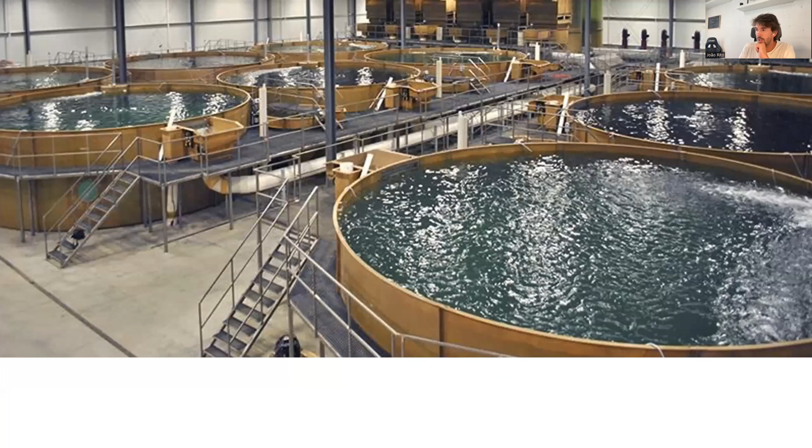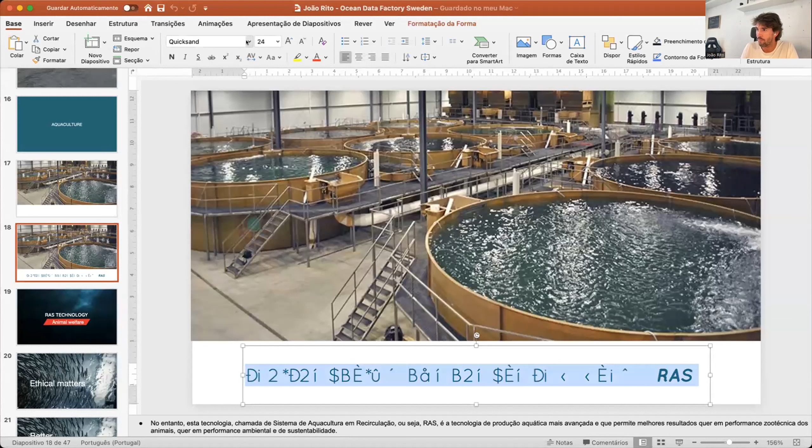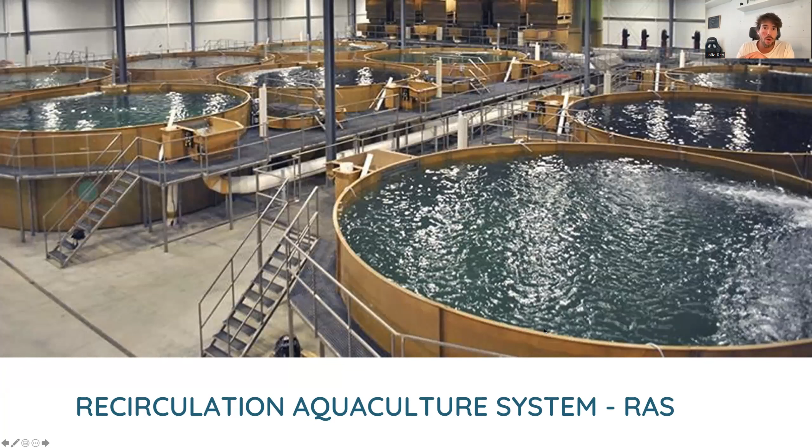But what I'm going to talk to you about today is not any of those examples I've just showed you — it's something similar to this. This is what we call aquaculture as well. Sorry, there's a mistake on this, let me just correct this. This is what we call a recirculation aquaculture system, RAS. This is another type of aquaculture, and we're talking about marine aquaculture using marine water, but it's all done indoors, in a completely controlled environment, land-based. Hopefully it's usually located onshore, close to the coast, where we can actually have access to the seawater.

And why RAS? Why do we trust RAS technology? Well, RAS technology is, in our point of view, a way of assuring animal welfare. And to us, animal welfare is the most important point when we're talking about farming animals. I'm going to talk about all the points.

First of all, obviously, because of ethical matters. As a biologist, I do care about organisms, I care about nature, I care about animals, and it would make no sense to me to farm animals without taking care of them, without taking care of their welfare. For obvious reasons, they are sentient animals, sentient organisms — promoting suffering would not be the point of our operations.

Also, by taking care of animal welfare, we get a better zootechnical performance from those organisms, because they are well treated. They can actually respond better physiologically — they work better, they have better conditions. And those better conditions are reflected in the results and performance they have in these systems. One of them is fast growth — a fish can grow much faster if it's maintained in good animal welfare.

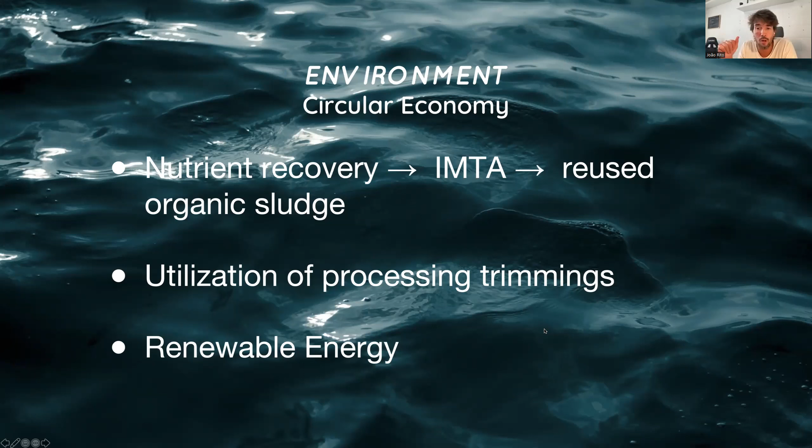And now, just to finalize, I'm going to show you what we usually show as a pitch presentation of our company. So, based on all these concepts I just talked about, we created SEAentia, a startup, an aquaculture startup located in Portugal.

Our objective is to tackle this problem: are we able to sustainably feed the growing world population and achieve the excellence demanded by consumers in topics like biosecurity, diversification, transparency, and sustainability? According to the FAO, by 2030 fish production needs to increase by 110 million tons, which means we can reach 1.1 trillion euros of income.

Our proposal is to produce what we call corvina. In English it's called meager, but we prefer to use the Portuguese name, corvina, which is a high quality white fish with a very good nutritious profile, excellent taste, low feed conversion ratio, fast growth, and already some public acceptance.

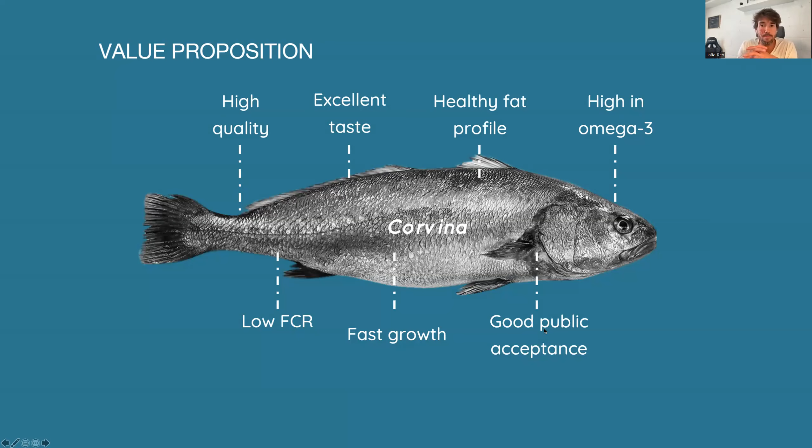We will be the first company in the world producing corvina in a recirculating aquaculture system, RAS, which allows us to promote animal welfare and avoid diseases and parasites without using any antibiotics or other chemicals. So we will not contaminate the water and we will not contaminate your food.

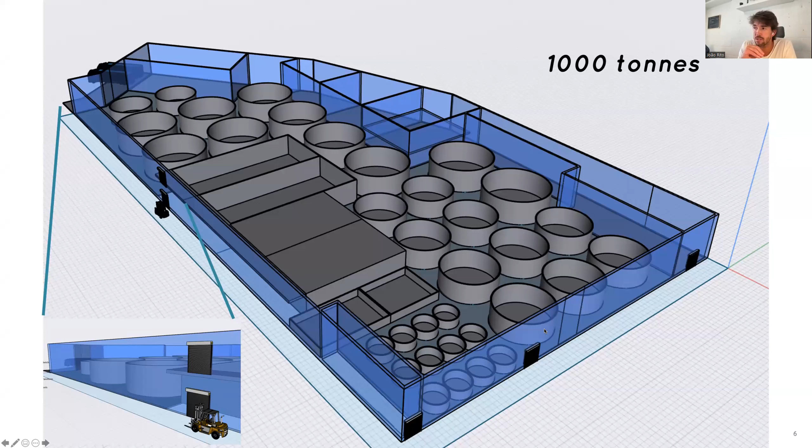This system is designed to be implemented in an area of about 12,000 square meters. This isn't updated, but it's actually going to be able to produce about 1,500 tons of corvina per year.

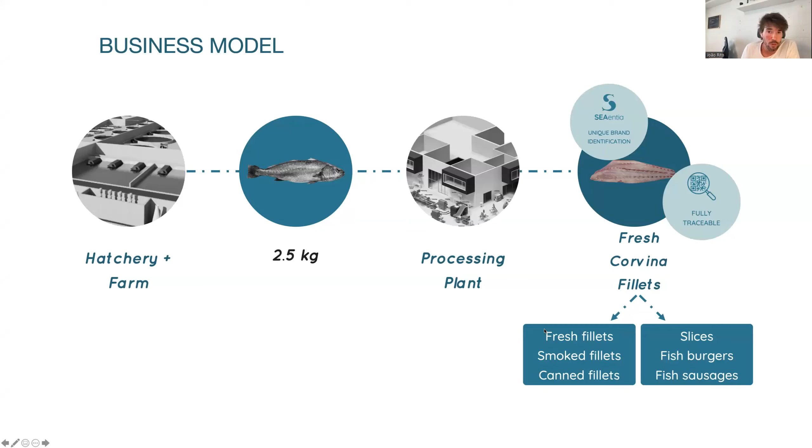The model is going to be with our own hatchery and farm. We can grow corvinas up to 2.5 kilos, then process the fish into different products like fillets, smoked fillets, slices, burgers, sausages, whatever—all identified with our own brand, fully traceable and also certified.

Like I was saying before, we bet a lot on circular economy to reach our sustainability standards. One thing we want to implement, not yet done, is to use the sludge as fertilizer or for biogas production, to use effluent nutrients to produce lower trophic level organisms through an integrated multi-trophic aquaculture system, and also to use processing trimmings for fish oil and fish meal production.

Regarding solar energy production, we can cover the rooftop of the whole building—talking about 12,000 square meters—and optimize energy production, with payback of that investment in about 3 to 4 years, which is quite fast.

Obviously we have competitors: fisheries supplying wild meager and offshore farmers supplying farmed meager. But we have a distinct advantage—providing biosecurity, traceability, quality, and environmental protection all together in this piece that can be your food. By choosing this food, you can help save the ocean.

The team is comprised of me and Nuno Leito. We are two biologist friends who got passionate about aquaculture and decided to implement our knowledge to start a company and play a bigger influence in society. Other partners include the stakeholders and shareholders of the company: João Jones, Sonia Rito, Thierry Lousteau, and another company called All the Way.

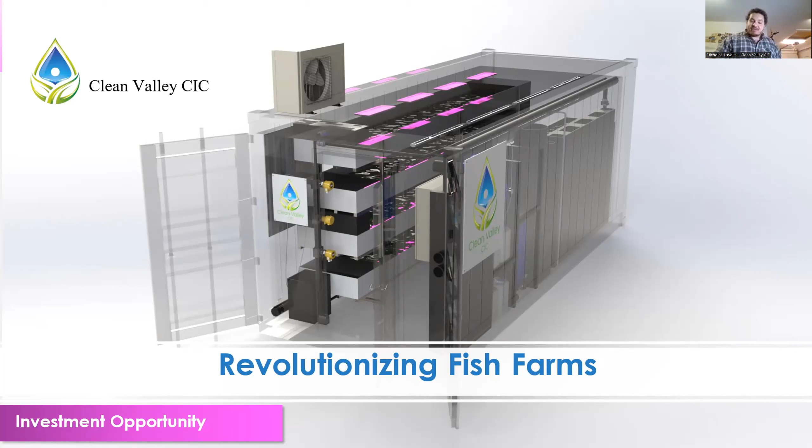João's already given a perfect introduction to what aquaculture is, so I'll be brief in my explanation. I'll just provide some further stats on the industry as a whole, and say that it is growing.

Even as I speak now, this chart, which was famous for being shown around from 2015 to 2020, is now out of date. It showed aquaculture near 50% of how we normally gather and get our fish to the dinner plate. Now it's closer to about 75% of the fish we buy in grocery stores that comes from aquaculture, and that trend is only going to continue to grow.

So aquaculture is not only seen as the way we are going to feed the world, but as a more sustainable way to feed the world. There's a ton of United Nations SDGs tied to aquaculture, from providing cleaner water and recirculating economies, to more innovative communities and cities. It will provide new ways to protect life below water and bring vitality back to regions in the oceans and seas that have been left destitute for decades and hundreds of years.

Aquaculture, as João showed you, is essentially fish in tanks, and it's a practice that has been around for thousands of years. Think about pond aquaculture back in the ancient days of China and India, where you take fish, put them in a pond, and feed them until they're big enough to harvest.

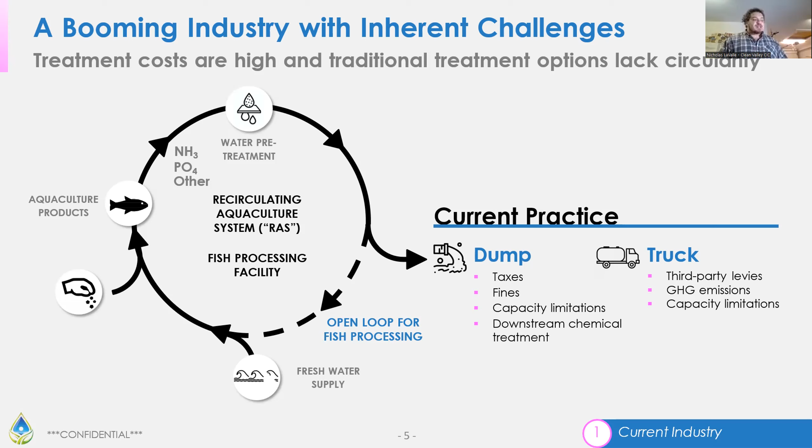The current alternative solutions are either dumping it into a local ecosystem or down a municipal drain, having it trucked away to a facility, or treating it on site. We are here to provide a solution to that, but we are not the only ones out there.

Rest assured, do not get any anxiety, but there are plenty of folks out there looking to utilize that last little bit of aquaculture waste that cannot be treated and try to grow different compounds from it. There are a few companies on our competitor list also looking to valorize aquaculture waste, turning it into algae, and others turning it into insect feed that can be reused as a protein source.

We are the only ones out there, though, going with probably the most elegantly simple solution, and that is growing algae purely to then feed it to oysters. That is where our area of expertise lies.

Our way to provide integrated multi-trophic aquaculture to land-based facilities is we utilize that end waste that João was talking about, which cannot be treated, to grow microalgae from it. We usually do that with what's called a polyculture, multiple strains of algae all working together, and that algae is a natural feed source for oysters.

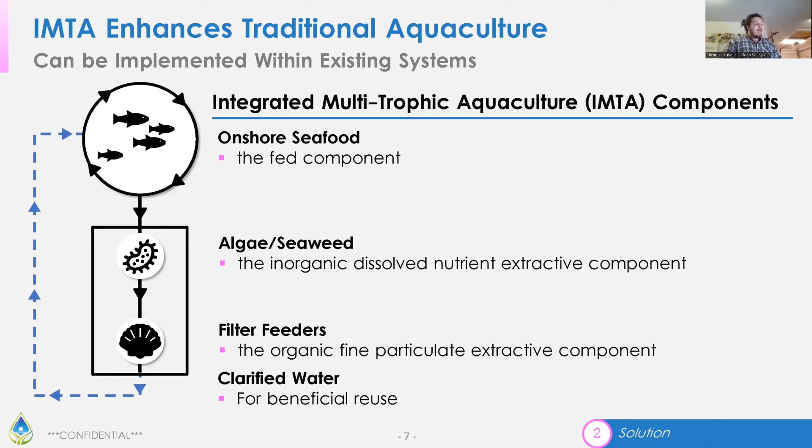This is a completely natural thing. In fact, this entire concept is akin to biomimicry, because we are mimicking what is being done in the ocean. When you look into the ocean, you don't see fish growing over here, algae over there, and oysters down here — they're all integrated into one harmonious ecosystem. That is what we are trying to bring back to land-based aquaculture facilities.

And when it all comes together, it looks something a little bit like this. You have your fish growing in a RAS facility, and the end nutrients that would go down the effluent pipe are instead sent to our system, where algae and oysters are grown, and both are utilized and valorized in different capacities.

The big thing here, of course, is that an IMTA certification for a facility increases the price that the fish can then be sold on the market. This sustainable practice earns marketing or accreditation benefits in terms of how much the price of the fish can be increased, and what we've seen is that it can go upwards of about 5 times the original price.

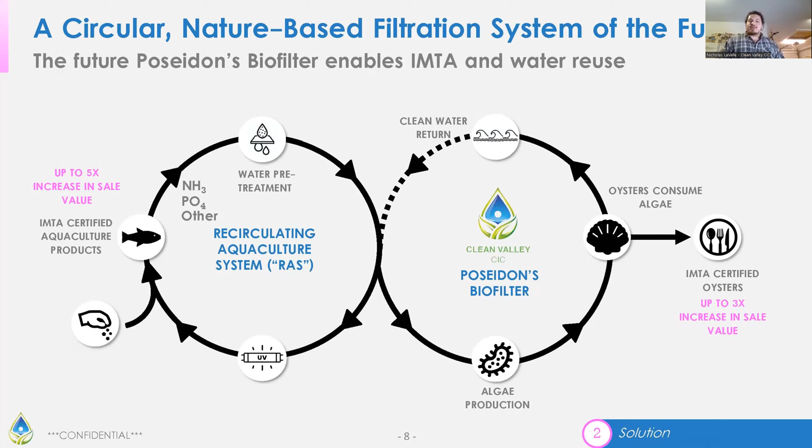And of course, that's just for the RAS facility. We are also working with local oyster farmers to feed their oysters at the final stage before they're sold on the market. In most places in the world, except for Canada and the United States for some reason, an oyster is not sold by the oyster, but by the pound. So if you increase the weight of an oyster by feeding it algae, you can increase the price of that oyster, and therefore the quality. That's the value proposition an IMTA system can offer in a commercial sense.

There are other values that come with using an IMTA system like the one we've designed, including the fact that it's a decoupled system, so it poses no risk to the RAS facility. That way João and his team can focus on growing fish and doing what they do best, while we worry about the algae and oysters on our end.

It also increases the triple bottom line, where it's not only increasing the profit made per year, but also the value to the surrounding ecosystem and community.

One other thing worth mentioning is that we're working toward the ability to recirculate the end water that comes out of our biofiltration system. Right now, we take in that end effluent water and utilize it for its nutrients, but we're taking steps to clean that water so it can be recirculated back to the facility and reused as gray water or as a new water source. That's very important for parts of the world where water availability is limited, or where there's a high cost for using municipal water.

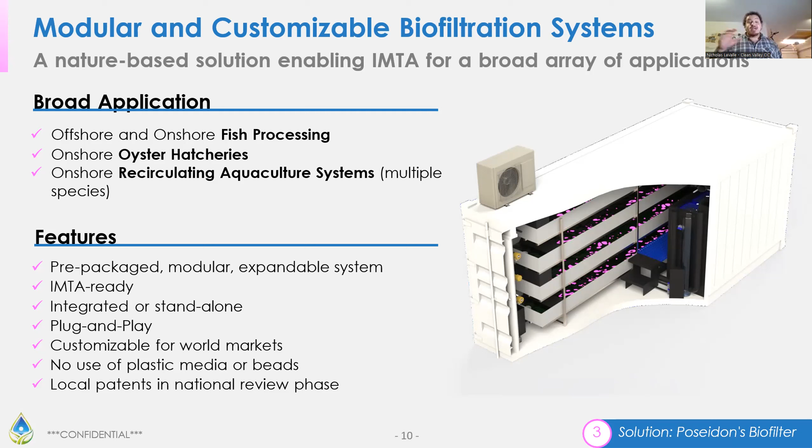And then, when we were feeding that to the oysters in the next reactor chamber, we saw they were growing to about an average of 10 milligrams per oyster, which was really exciting. We were really happy with these results.

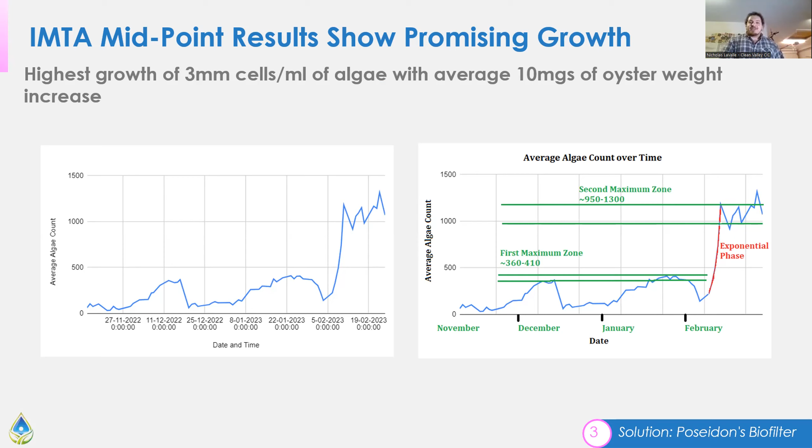And to give you a better idea of what the system is going to be deployed and how it all works and looks. So the Poseidon's biofilter is separated into 2 different sections.

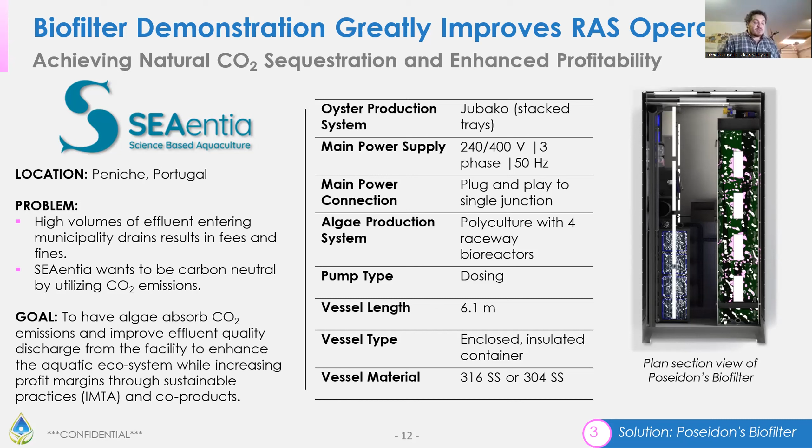This 3D render here and the previous one you have seen, as I mentioned, will be deployed near the end of this month and will be running until the end of November for this year.

We've divided this whole project into 3 phases. The first phase was looking at how we can purely take nutrient-rich water and grow algae from it and see how much algae we can grow, and perhaps see a reduction in nitrogen and phosphates. There were no phosphates, so there wasn't anything to be concerned about there. We didn't see too much of a drop in the nitrogen, but thankfully, SEAentia's biofiltration system within their facility was doing a bang-up job, so we didn't have to worry about that.

For phase 2, we wanted to focus on purely replicating that in the larger system that we're going to be deploying, the 3D render that I showed you. That begins at the end of May. Then phase 3, after we've run the nutrient-rich water from the facility in that new system for a while and we're comfortable with it, we move on to taking the end effluent water purely, rather than where we're currently grabbing the water from, and trying to grow as much algae again from there, feeding it to oysters.